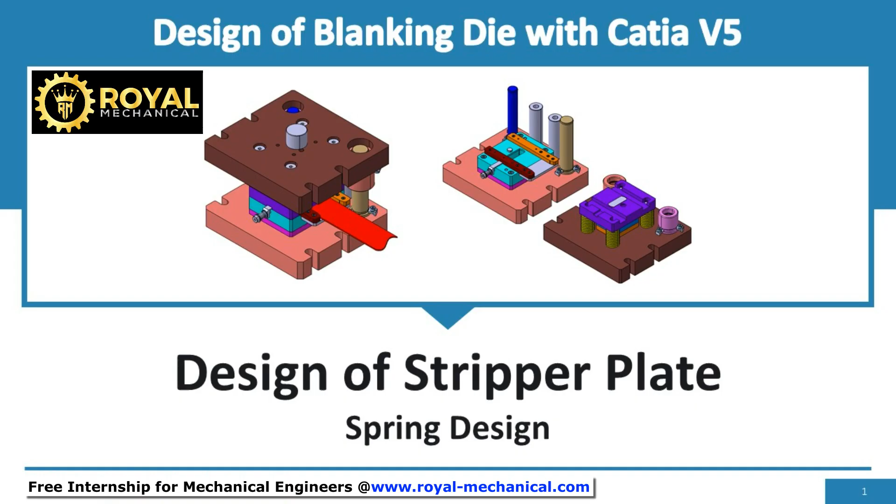Welcome. In this e-learning module, I shall make you understand how to design the spring for the stripper.

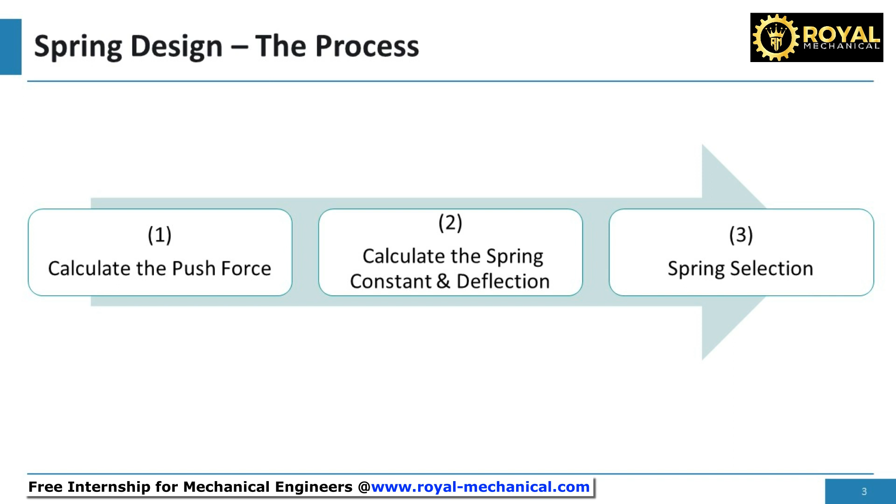Remember, we had designed the spring for the strip pusher. To design the spring for the strip pusher, we had used this three-step process. Step 1: calculate the push force. Step 2: calculate the spring constant and deflection. Step 3: spring selection. Let's get started with Step 1. We shall calculate the push force.

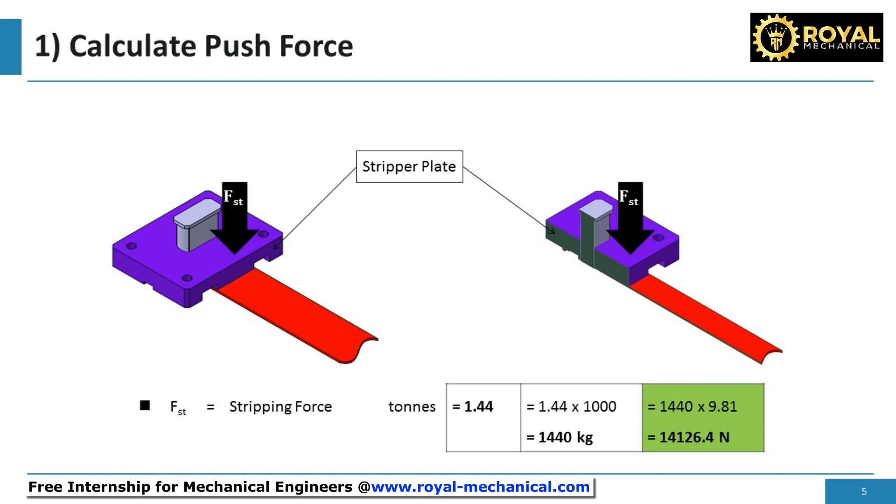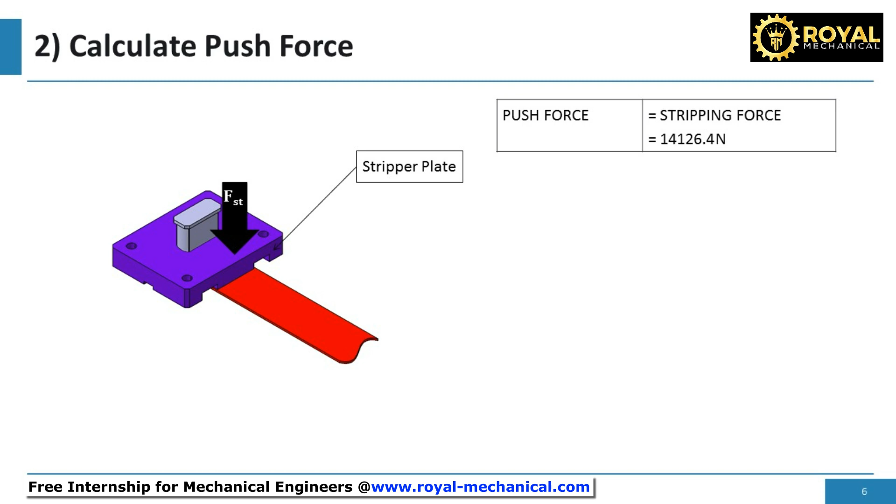In the previous e-learning module, we had calculated the stripping force. The stripping force FST is equal to 14,126.4 newtons. The push force is equal to the stripping force. This means we need to apply a force of 14,126.4 newtons on the stripper plate to strip the sheet metal, which gets stuck to the blanking punch after blanking.

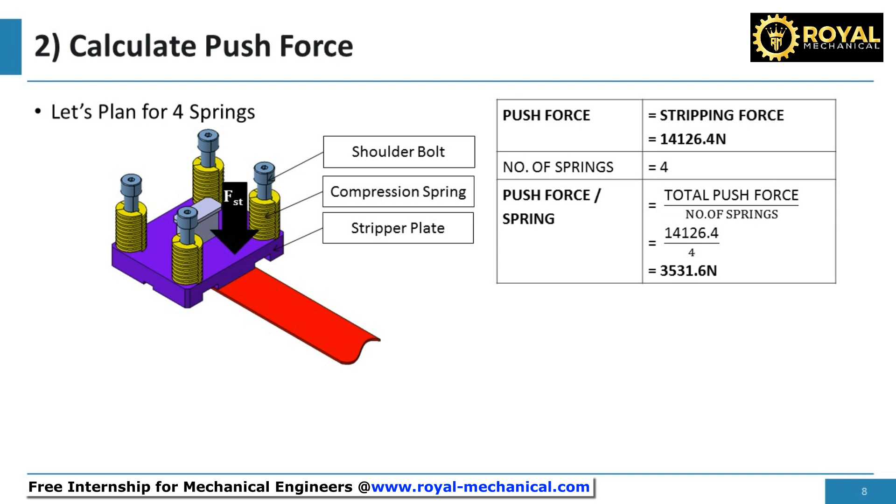Let's plan to use 4 compression springs on the stripper plate. Observe the springs are mounted on the stripper plate with the support of shoulder bolts. The push force per spring will be 14,126.4 newtons divided by 4, equal to 3,531.6 newtons. So, each spring should apply a force of 3,531.6 newtons on the stripper plate.

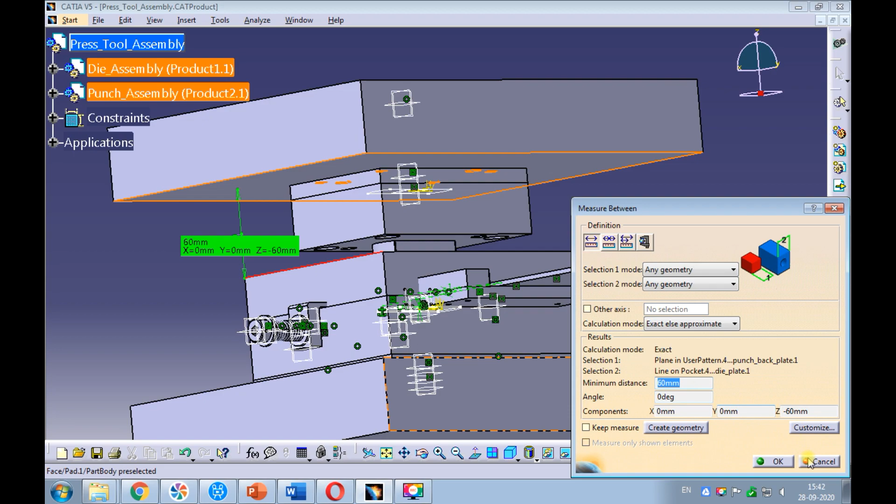Now let's calculate the spring constant and spring deflection in the second step of the spring design process. Measure the distance between the top plate's bottom surface and the top surface of the stripper plate. This is where the spring shall be mounted. The measured distance is 60 mm. As the press tool is being designed in the closed condition, that is at the bottom dead center, this is the compressed length of the spring.

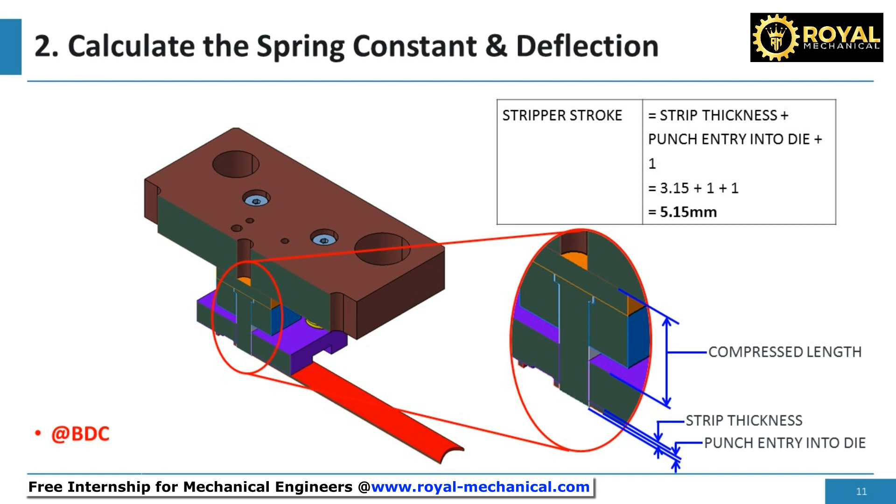The strip gets stuck to the blanking punch after blanking. To strip the sheet metal from the blanking punch, we need to move the stripper by 5.15 mm. 3.15 mm is the strip thickness. 1 mm is the punch entry into the die. And an extra 1 mm to make sure the sheet metal is positively stripped from the blanking punch. So, 3.15 mm plus 1 mm plus 1 mm is equal to 5.15 mm. This is the stroke of the stripper plate.

The space available for mounting the spring is compressed length plus the stripper stroke, which is 60 mm plus 5.15 mm, equal to 65.15 mm. Remember, when we are physically assembling the spring, the press tool is in the open condition. The open condition is the same as the condition of the press tool at the top dead center. So, the space available for mounting the spring is 65.15 mm.

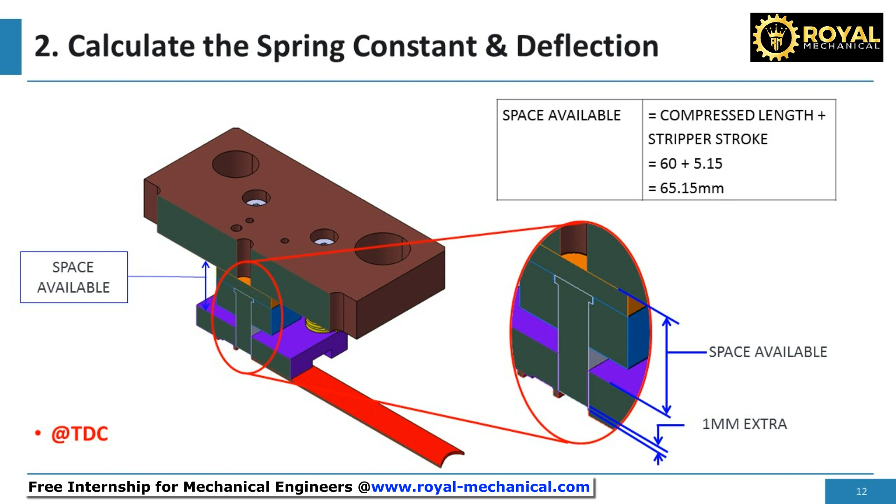Generally, when we mount the spring, it is preloaded by 5% to 10% of its length. For example, a spring of 10 mm is mounted in the space of 9 mm, so that the spring is always compressed by 1 mm. This compression is called preload. We can calculate the total length or free length of spring. The total length or free length of spring is equal to space available divided by the preload amount. 65.15 divided by 0.9 gives us the total length or the free length of spring as 72.4 mm.

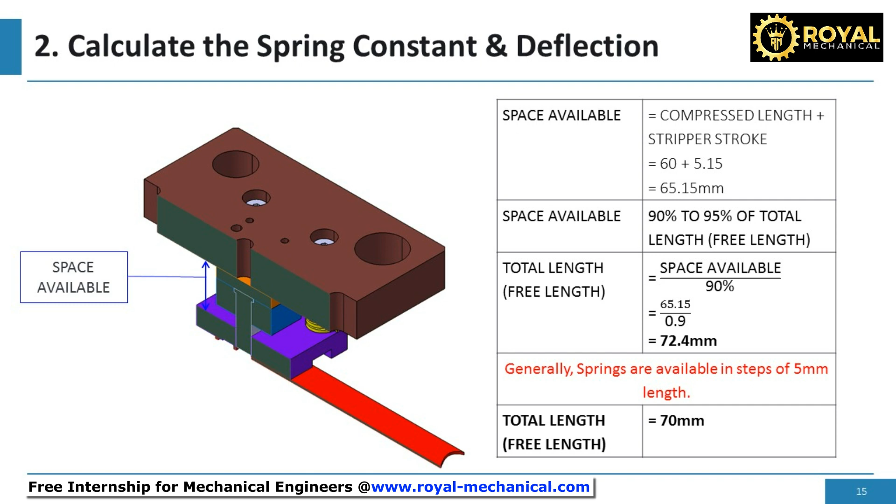Generally, springs are available in steps of 5 mm length. Hence, we can finalize the total length or the free length of spring as 70 mm. Note with 70 mm as the total length or the free length of spring, the preload is 7%, which should be just okay. As the strip is stuck to the blanking punch at the bottom dead center, we need the push force of 3,531.6 newtons at the bottom dead center.

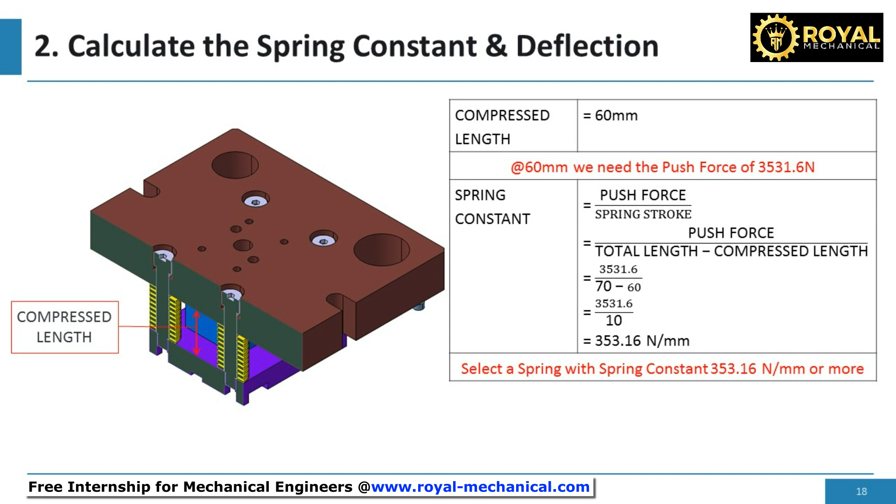The spring constant can be calculated by dividing the push force by the spring stroke. Spring stroke is the difference between the total length and the compressed length of the spring. 3,531.6 newtons divided by 10 mm, we get the spring constant as 353.16 newtons per millimeter. Hence, we need to select a spring with spring constant 353.16 newtons per millimeter or more.

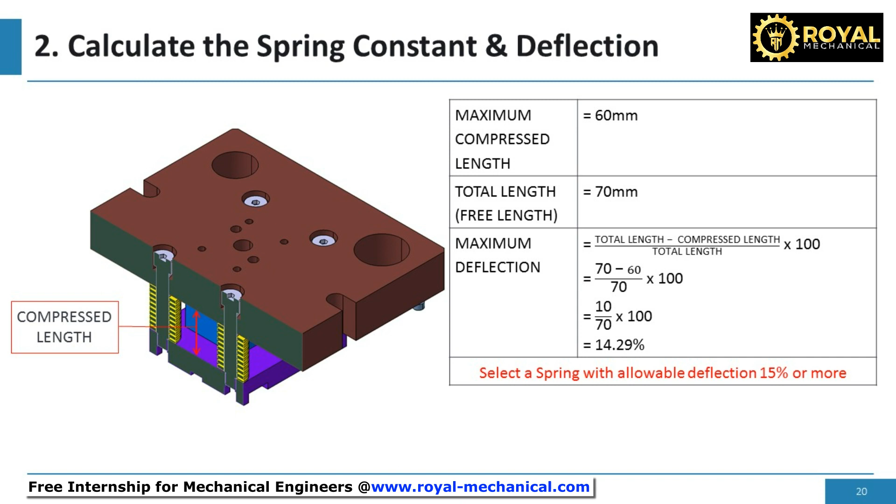Now let's calculate the maximum spring deflection. Maximum spring deflection can be calculated by dividing the difference between the total length and compressed length by the total length. The calculated value of the maximum deflection is 14.29%. Hence, we need to select a spring with allowable deflection 15% or more.

Now let's select the spring in the third and final step of the spring design. We have already calculated the free length of spring as 70 mm. The spring constant should be more than or equal to 353.16 newtons per millimeter. The maximum allowable deflection of the spring should be more than or equal to 15%. By referring to any spring catalog on a spring manufacturer website, select a spring matching these criteria. I recommend you search on the internet and choose the compression spring.

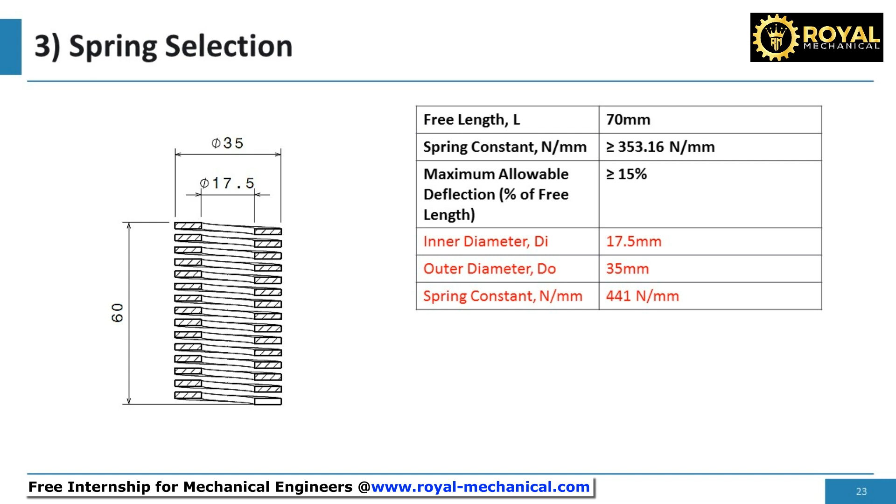I have selected the compression spring. The inner diameter of the spring is 17.5 mm. The outer diameter of the spring is 35 mm. And the spring constant is 441 newtons per millimeter. With this, we have successfully designed the spring for the stripper.